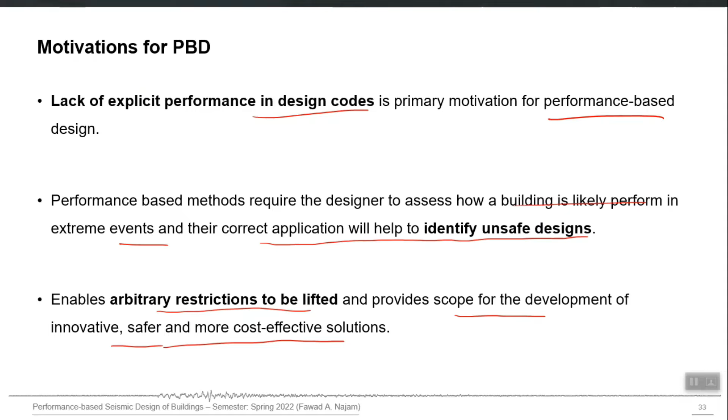So you can start with a basic design which can be done by following a particular building code, and then explicitly check the performance of that design using performance based methodology, right. If a certain performance requirement requires you to go against a particular provision of a building code, you will do that under certain limitations and under certain requirements and approval from the authority having jurisdiction, right. So performance based design gives you that freedom to go for innovative geometries, innovative materials, innovative forms, still having cost effectiveness in your designs.

So in the 1980s and 90s, as I stated at the start, in the prevailing era of building codes, the owners began to question how their buildings would perform in future earthquakes and demand that engineers design or upgrade their buildings to perform better. So the owner actually sets a performance objective, right, and that may be different from the intention of a building code, which is life safety.

Owner may say that I want to go beyond life safety, my structure should remain completely operational at the design level earthquake. This requirement that it should remain operational is a performance objective which is set by the building owner for the structural designer. Now you are free to use any design method, any analysis procedure, but you have to just follow that requirement. Unless you fulfill that performance objective, which is no downtime or completely operational during the design earthquake, unless you follow that, you are not okay, right.

So the owners usually express their desires in terms of a series of performance objectives, and as I just gave you one example, there can be several performance objectives. I want my existing building to be safe under this earthquake. I want to be able to use my building right away. It should remain operational. After an earthquake, it should be directly occupied again, right. So I don't want to allow even any non-structural damage. This can be one performance objective set by the owner.

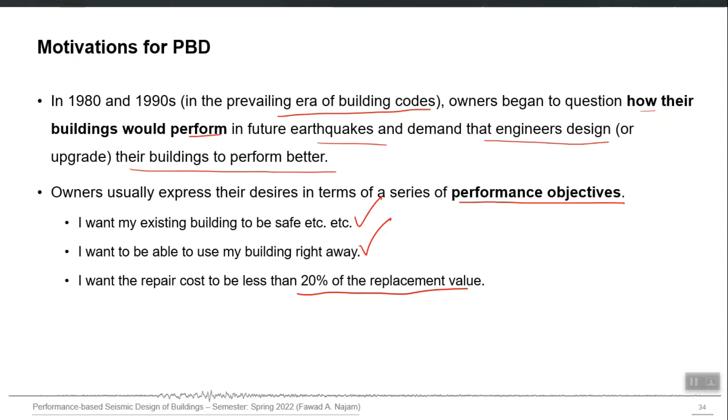I want the repair cost to be less than 20% of the replacement value. This can be one performance objective. And there can be performance objectives in terms of social losses also. I don't want anyone to get injured in case of this much earthquake, right. It can be related to downtime, replacement cost, repair requirements, damage to a particular structural component. It can be related to anything, not only cost and damage, and you are required to fulfill that requirement. This is what PBD allows you, right?

So, it is an approach in which the structural design criteria are expressed in terms of achieving a set of performance objectives. When a particular performance objective set by the client becomes your design criteria, it is called PBD, right? And that performance objective can be anything. I gave you a few examples in the last slide. So, you will use all of your experience, efforts, analysis, design, knowledge, everything, just to fulfill that requirement, because that requirement now becomes your design criteria, right?

So, this is in essence what performance based design is, that the structural design criteria is not expressed in terms of following a particular building code, it is expressed in terms of fulfilling a particular set of performance objectives which are agreed upon between client and structural designer, right.

So, it means that the very first step of PBD is to have a consensus on what will be our performance objectives, right. What actually you want me to do as a design criteria. So, we start with conventional code based design, but then we use the additional performance objectives as our design criteria in this approach. But obviously, if you want to explicitly verify the structural performance, it may not be possible using linear analysis.

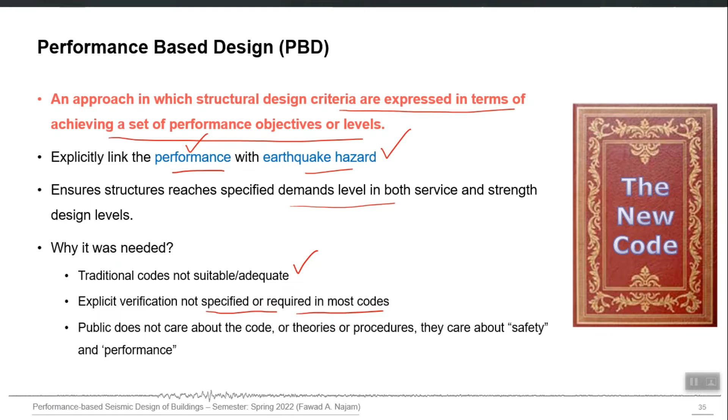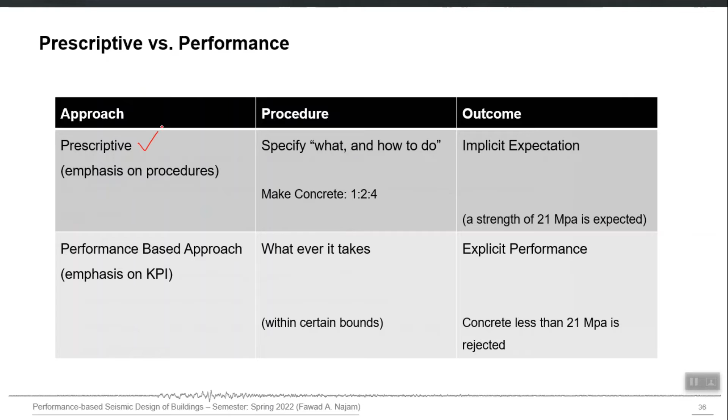So, another example of how the prescriptive approach and the performance based approach differ. If, for example, I want to go for the prescriptive approach and my target is to get a concrete of 21 megapascal strength, a prescriptive approach will specify the mix design, and implicitly it will ensure that the resulting concrete will have a strength more than 21 megapascal.

On the other hand, if you go for the performance based approach, the emphasis is on the key performance indicator. So, the emphasis is that you have to come up with a concrete which has strength more than 21 megapascal. Concrete less than 21 megapascal is rejected. So, you are free to use any method or any recipe which ensures that 21 megapascal. So, this is an example of how the requirement is prescribed in a prescriptive manner and in the performance based manner, right.

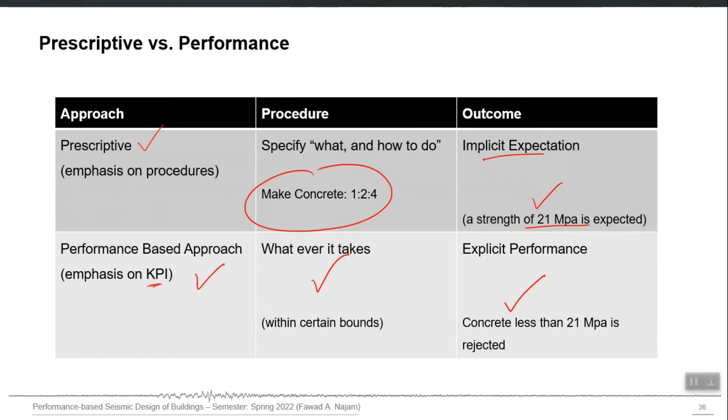So, I will end on this point: the essence of PBD is what? That a decision maker states a desire that a building be able to perform in a certain way. That desire, or that performance objective, can be anything. It can be based on the protection of life safety, minimization of the potential repair cost or disruption of use, for example. The engineer uses his or her skills to provide a design that will be capable of achieving these objectives, right.

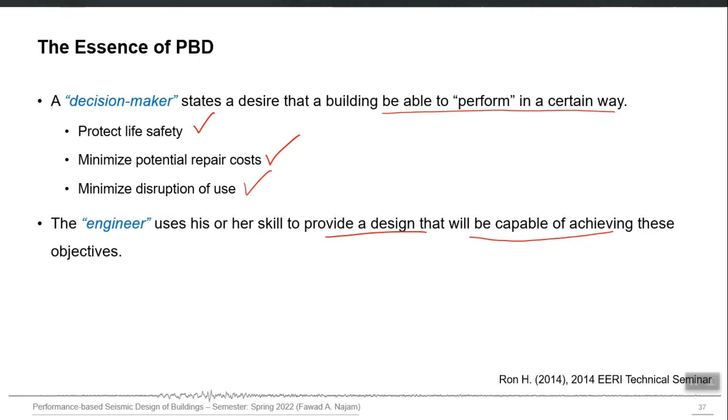This is the summary, or essence, of performance based design: the owner's desire, the client's desire of the performance, becomes your design criteria, right. And obviously, in order to fulfill that requirement, you have to go beyond code. If you are a traditional structural engineer who only knows linear analysis and linear modeling, you will not be able to fulfill that requirement, right.

So, the performance objective is a combination of two things. One is the requirement itself, which we call the performance level. It is the maximum acceptable level of damage given that the ground motion occurs. This level is set by the client for you, right. It is something which is acceptable for him, but this should always be accompanied with the ground motion hazard, right.

The complete performance objective can be like, I want no damage in my columns and beams at this much level of hazard, right. So, it should always be accompanied with the level of hazard. It is not no damage for all the cases. At this much level of hazard, I want no damage in my concrete walls, columns and beams. But at a higher level of earthquake, I may allow some cracking, right,

because a higher level is a rare earthquake. There is a possibility that I may never experience that higher level. So, making a structure completely elastic against that higher level will not be a wise decision, right. If there is an earthquake which may never come in the design life, which is that rare, then you may allow some damage in order to make the design more economical, cost effective. So, the performance level is always accompanied with the ground motion level, and this makes your performance objective, right.

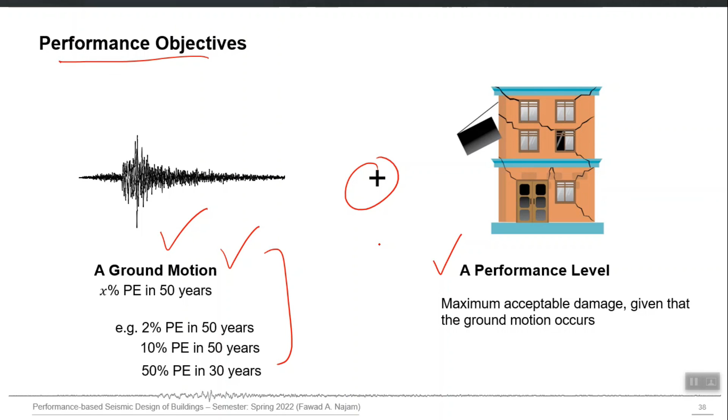There is a proper setup for the routine checking of the existing building stock, right? And wherever there is a need for a particular retrofit or detailed evaluation, obviously there is a mechanism in place for that. Please check the ASCE 41 document, which is the seismic rehabilitation of existing structures. It prescribes a 3-tier process. The first tier is for all buildings, then you identify any deficiencies, narrow down your scope, and check in more detail the few structures which require that evaluation, and finally tier 3 means a very detailed evaluation for the retrofitting, right? So generally the overall building stock is surveyed or checked after certain years.